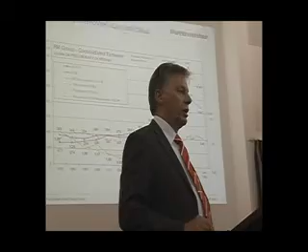Here I show you some aerial pictures, which is the headquarter, the special place where the welding and beam construction is done. Then South Africa, I have forgotten before, but we have an operation, you see the picture. America, India, China. On this graph you see that Putzmeister was really hit by the economic crisis. I show here only 2008 because 2009 was even lower than that. Nevertheless, we still hold about 3,300 people worldwide trying to serve the customer.

Organization. Putzmeister is in a holding organization with the columns of concrete technology, mortar technology, pipe technology and industrial pumps. And underneath there is the Putzmeister Solid Pumps. Our markets and applications: it is offshore, it is biomass, it is dredging. Biomass, maybe we have a subject over here. Offshore, maybe more in Nigeria. Sewage treatment plants, waste recycling, cement industry. Power station, mining and miscellaneous. You will see during the presentation, we will have about 30% of our turnover in the next 5 years in applications which we don't know yet. We are really at the start and looking forward to a very successful future.

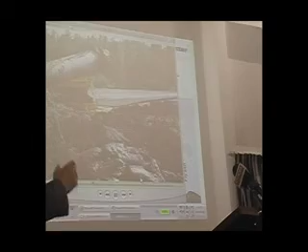And I show you an animation where you can see, hopefully you see soon, yes, how media is pumped with a solid content of 20% only. Here you see organic waste. We have organic and inorganic. Mainly in Ghana, I believe we will concentrate and focus on the inorganic waste, where we can reach a solid content up to 85% dry solid content. Slurry, paste, cake. These are the names of the things we try to pump.

And you see here the limits of centrifugal pumps, because here the shear stress is plotted over the percentage of solids. In other words, up to the end of the turbulent flow, you can go with centrifugal pumps. Here we have an overlap, so we don't really have competition with centrifugal pumps. It's a different media, it's a different application. And we go up to cake. We cannot do each and everything, but we can do a lot. And you can see here a very, very wide range. Even over the liquid limit we can go.

If you cluster it: tunnel application, mining application and industrial application. In industrial you have paste transport, you have earth transport, you have ash, you have coal, and you have dredging, which is the normal soil. In mining you have tailings, you have backfilling, mud, injection, shotcrete, coal transport, mineral transport, ash transport.

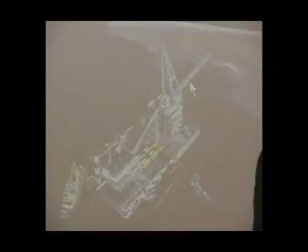Here we have an example in Japan, where the biggest dredging pump from Putzmeister solid pumps is installed. You see it here, and the whole airport is filled up with the pumps of Putzmeister as land reclamation. Later on you see the S-tube, and I have to come back because the weight is very important to tell you how robust and durable these pumps are. Another dredging, this is the site I just mentioned.

And here you see a twin pipe. Even on a lake, you can leave it on a floating pipe and bring it, let's say, if it would be a dam, you can bring it and make it green around it, using the soil and recycling it.

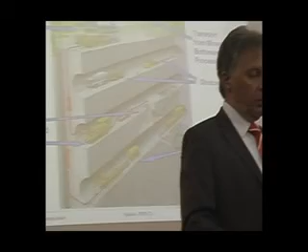Now I go underground. We have mines in Ghana, up to which depths? Eric, you know that? Anybody else knows that? 1.5. Okay, so comparable with Germany with the coal mining, yes. Good. So within there, you can get the water out, you can get the mud out, you can backfill. In most cases, blowers are used to backfill. But here, even in China, these pumps are used to backfill.

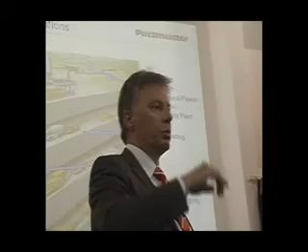Because if you have a mine with about 800 meters or 400 meters, stay with 400 meters, you have two shafts. And with a big shaft, the earth, after you have finished the exploration, will go down, maybe by 50 centimeters. And if your groundwater is at minus 20 centimeters, later on you can plant rice at that place. So in some cases it's not recommended to let it go down.

And as well, it goes together with the ventilation. You can easily use it and build the walls where you want them. And you don't have to use machines because you just bring the pipe where you want it, you pump it, and leave it. We even thought about assisting the Americans with BP to close that hole with concrete pumps, but they already failed with the mud, so concrete cannot get there. Backfilling, I mentioned it.

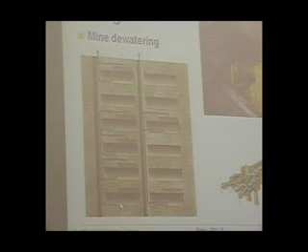Here as well, I run a little bit in competition to centrifugal pumps, which normally are used in the mines. You can see here 25 centrifugal pumps, which are dewatering this mine shaft, and here 2 pumps going in a sequence, because these pumps go up to 1,500 meters with much less material used to create the pressure.

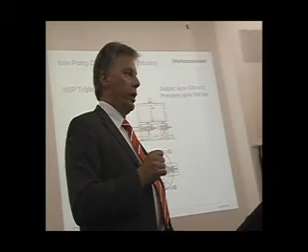Here we have a triplex pump. If people here are from the water section, you have water hammering. Anybody here from water hammering? No? Okay, good. If you shut off the pump, you have water hammer. And with a piston pump, it is very likely because you push and stop, and then the other pump pushes and stops to create fluctuations.

And then if you control the three of these pumps together, you can reach a pulsation-free pressure. You can see here, this is the pressure, then this is backdrawing, so it is filled from here and here, and then comes the next stop. So by this, you easily reach a pulsation-free operation.

If you have two pistons, you can reach this as well. Then you use a PCF valve, which is doing almost a similar thing, and the graph is shown here. You have a long suction, a pre-compression, and after the pre-compression has reached the pressure which you have in your pipe, then the valve opens and the delivery starts to continue.

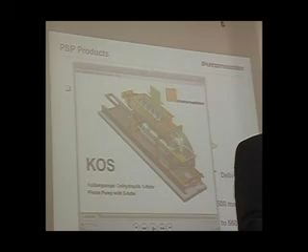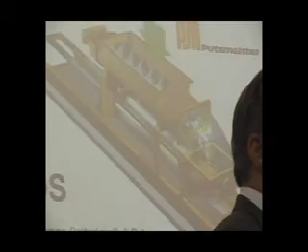And I have here hopefully an animation so you can see how such a piston pump is working. Before I start the animation, here is a pre-compactor, 2 screws which are rotating, feeding into the hopper, and then it goes into the pipe and through the S-tube into the pipeline. I hope everybody can see the animation. Okay. You see, the feed is coming from here, falling down here, being pumped in, pressed out when the S-tube is at its position.

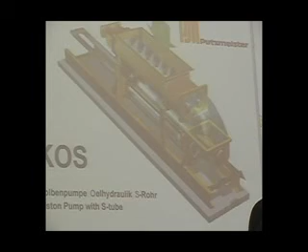And now I try to invite you to take a ride through the pump. I hope nobody will get dizzy. Now you see the S-tube. Now we are in the cylinder. The piston from the other side you see. And now you as a media are pushed out through the S-tube into the pipe.

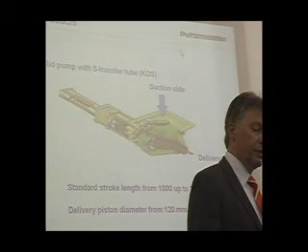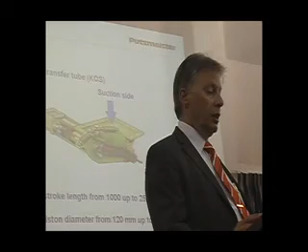The stroke length of these pumps from here to here is 1 to 2.5 meters. The diameter of the piston is from 120 millimeters to 560 millimeters. The pressure, we go up to 150 bar, which is 15 megapascal. So I really enjoy taking the bar, because the bar has a nice other word with me, which I like. 500 meters cube. And we have piston pumps which are in operation 130,000 hours trouble-free.

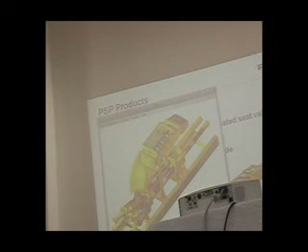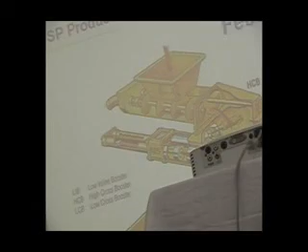I have here a summary of the basic pump types for ash handling, which is the KOS 2180. You see here the confirmation about the capacities and the maximum pressure of 150 bar. In water column it is 1,500 meters. And here you see the feeding devices. It's all engineered and manufactured by Putzmeister Solid Pumps. Now you can see you can feed from below, you can feed from up. The main thing, you have to have a reasonable filling rate of this piston.

As well, here I got an animation showing how it is fed, and you can follow by this red ball where it is going, and it is safely reaching the outside of the piston pump. Here is the ball going in, and the S-tube supplying it to the outside.

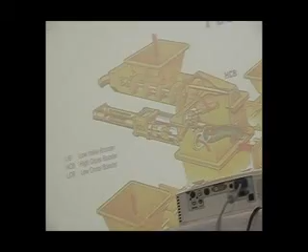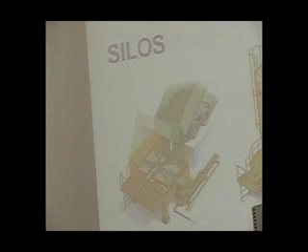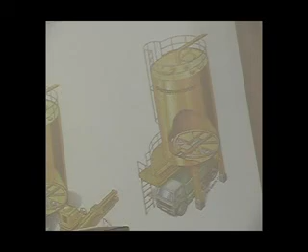You need to store these things so you have a continuous flow towards the pump. This is done by silos and pre-compacting, where you need as well hydraulic drives to get it out of the silo if you have a flat bottom, into the pre-compactor screws, into the pump. Basically, you can say from the silo up to the injection nozzles for coal slurry, we are doing a whole system. So we are not really eager to sell pumps alone, because it doesn't work. You need a lot of know-how how to use it in order to get the system to run well. But then it's running to the satisfaction.

Here you see these sliding frames in rectangular silos and circular round silos. We have here a picture. Unfortunately, I don't have a man standing beside that one, but if I would stand, I could just look into that pipe. This pump has 150 meter cube, it's 60 bar, and the hydraulic set to drive that pump has 2 times 500, that means 1 megawatt motor power. This is just one of 5 pumps which we have delivered and supplied to India just the end of last year. It is commissioned, it is working.

Putzmeister Solid Pumps has its own test stand. Up to 1.6 megawatt we can test whatever pump we have, even 60 cycles if it's wanted. And here are the first customers from Mexico, who had the works test in October last year. Development. We are doing development ourselves. We are improving the hoppers and the pipe connections, monitoring the SPH valves, reducing the friction loads to be efficient and well controlled. So it is all in our hands.